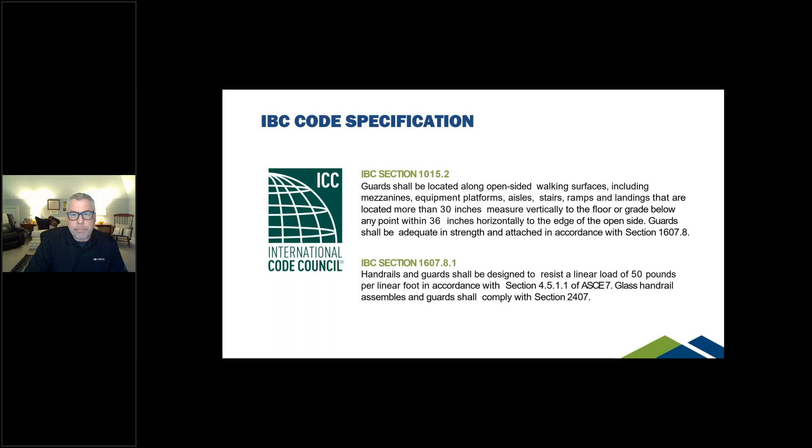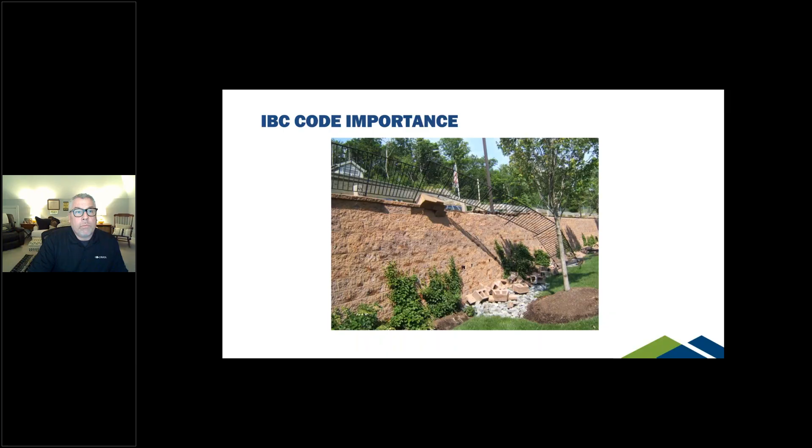There's other options, of course. One option, certainly, and this is code compliant, is to create a buffer zone between the wall face and the fence foundation. The NCMA best practices manual recommends having a 3-foot offset from the wall face to the fence foundation, and that allows you to meet the code, that 50 pound per linear foot.

As you can imagine, there's some issues around that though, and it's created the opportunity for a pre-engineered fence foundation system. In this particular case, that 3-foot offset creates some issues, and we'll touch on those in a minute.

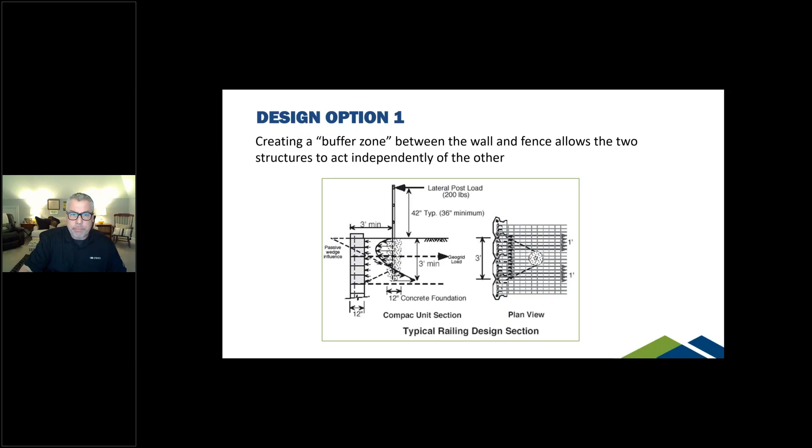But you've also created an area that's still a fall hazard. Kids are going to get in behind that wall, in between the fence and the wall, and you still have some issues.

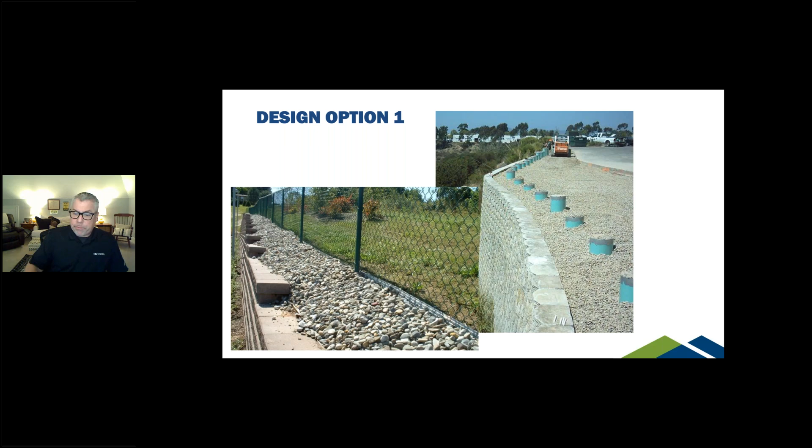Here's another example of that. And some of the other issues, obviously, you're losing real estate when you are placing the fence 3 foot back from the wall face.

There's safety concerns, as I mentioned, maintenance issues. And the other thing, during installation, the contractor's having to compact behind the segmental retaining wall, in and around the geosynthetic layers, and also having to contend with either a cardboard tube that's going to be filled with concrete, and there's real compaction issues around that.

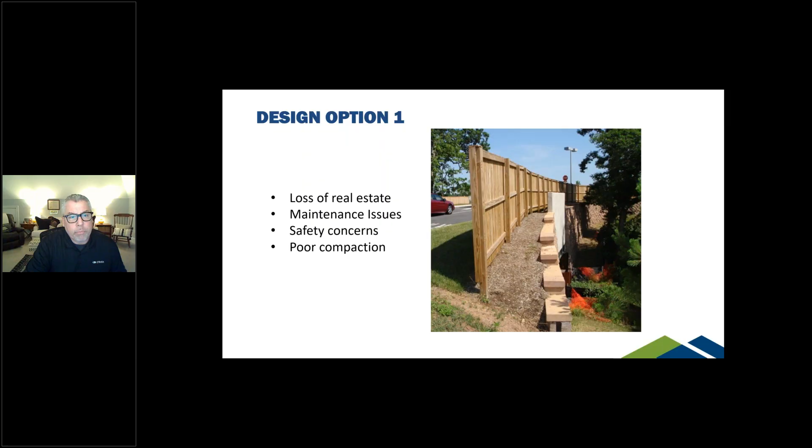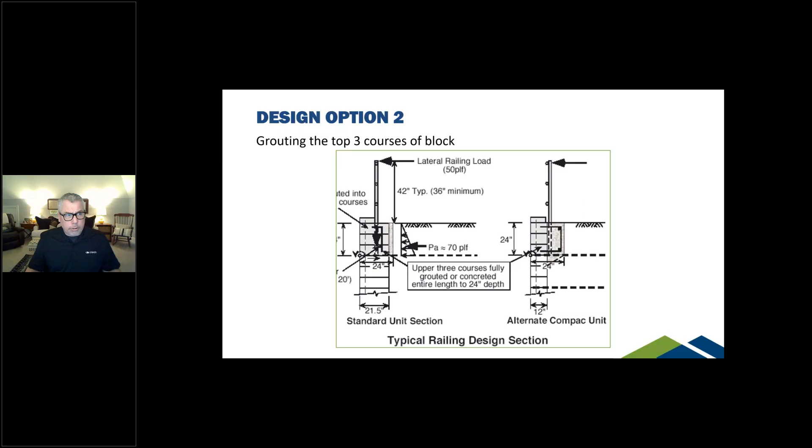Segmental retaining wall is meant to be a flexible structure. It often requires an independent review and design, certainly can be costly. And there's always this notion of having different trades having to work on the same structure, and that requires coordination. As I mentioned, it creates this rigid element.

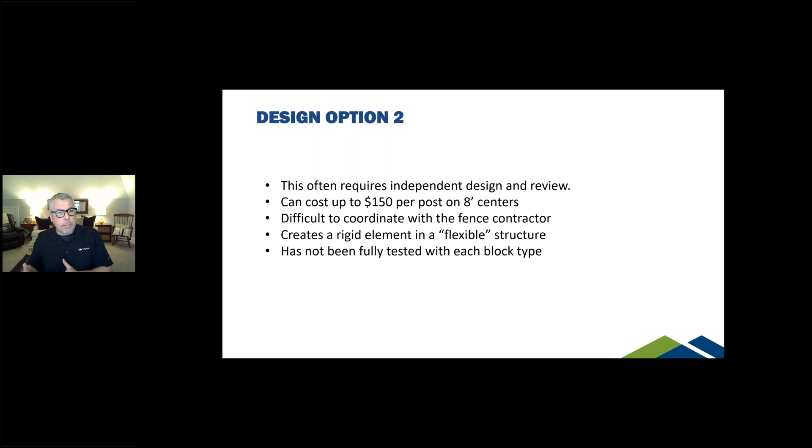There are different block systems out there, a lot of them, and each one has different nuances about them. So grouting some blocks is an option, while with others, you have to be in between them and directly behind them. It really just does depend on the geometry of the block itself.

So as we saw, bolting a wrought iron fence to the top of a segmental retaining wall is not a good option. It's easily failed. And the other option here that you see is coming back after the fact.

The wall's been installed, and the fence contractor comes in and says, I'll have to put my fence in, but there's been no accommodation for my fence post or handrail. Well, in those cases, they're augering through the compacted fill, through the geosynthetic layers, and that creates all sorts of problems. Not only is it difficult to do when you're going through compacted granular fill, but you have the possibility of catching that geogrid and pulling the wall, creating all sorts of headaches that are there potentially.

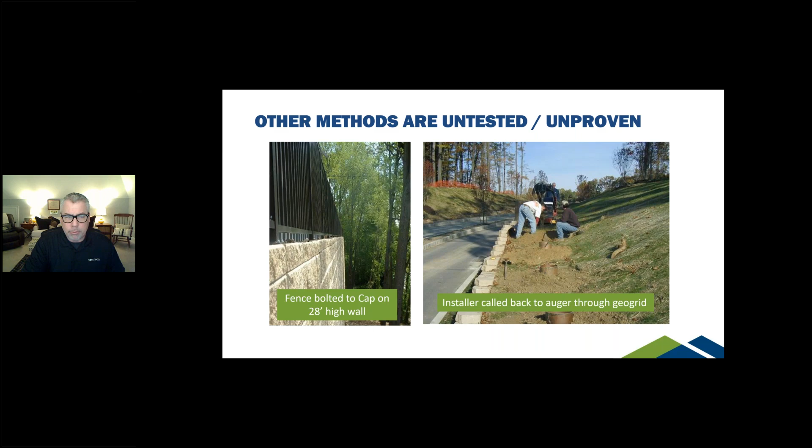So who is responsible? Is it the contractor? Is it the landscape architect, fencing contractor, the engineer?

Well, Sleeve It, our pre-engineered fence anchoring solution, addresses all that. It's been fully tested, code compliant, and it really does address the need for some thought ahead of time as to how to incorporate the fence or handrail behind a segmental retaining wall.

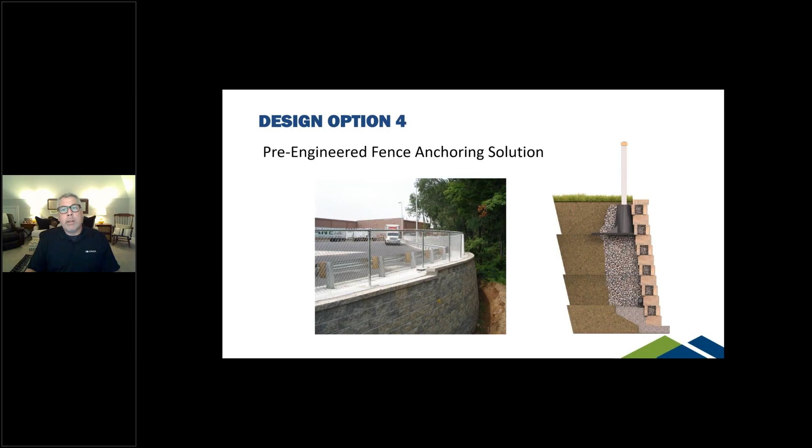As we discussed earlier, the IBC code requires 50 pounds per linear foot on the fence post or handrail. In many cases, we've seen in the past non-code compliant solutions just putting a sonotube right behind the blocks of the retaining wall for the top, let's say, three courses as shown here. That is not code compliant. We've tested it and it does not work.

So the Sleeve It has a cantilever design to it. It's an L-shaped base, and it engages the soil mass directly behind the wall and provides that resisting force to protect the wall face from deflection, and it engages that soil mass to do so.

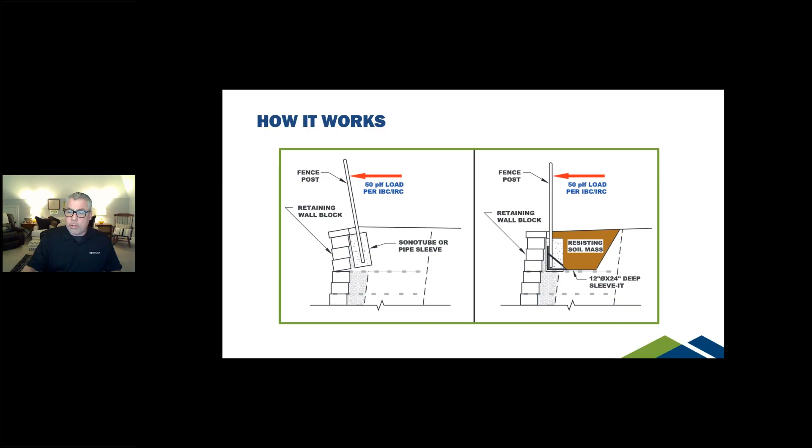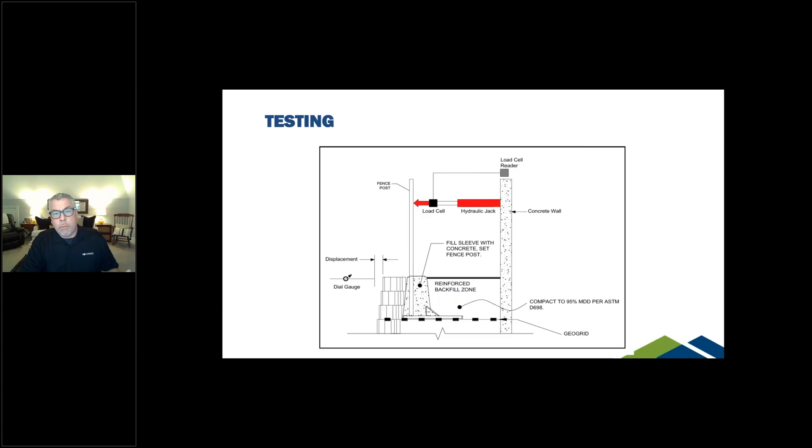In our testing, basically what we've done is taken the Sleeve It, built our mock wall, placed our fill, installed our fence post, and then loaded a hydraulic jack at 42 inches high on the fence post or handrail, and started loading it until failure. That is precisely how we tested it. Failure is basically displacement of the wall face itself. It's subjective to some degree, but displacement more than a couple inches is really failure.

So this is what we've seen in our testing of the cardboard tube or sonotube versus the Sleeve It product. The sonotube, when placed 6 inches back from the wall, is failing at about 100 pounds, and the Sleeve It is far outperforming. So the 200-pound concentrated load is assuming you have fence posts or handrails placed in 4-foot spacing, so there's your 50 pounds per linear foot.

The previous version of Sleeve It was the Sleeve It 1224R. Good system, required some assembly on site. The Sleeve It SD1, which is our newer system, is a one-piece unit, and actually outperforms in our testing the Sleeve It 1224R. Although that was a good system, it just required that assembly on site. We've solved some real headaches for the contractors out there by launching the SD1 product.

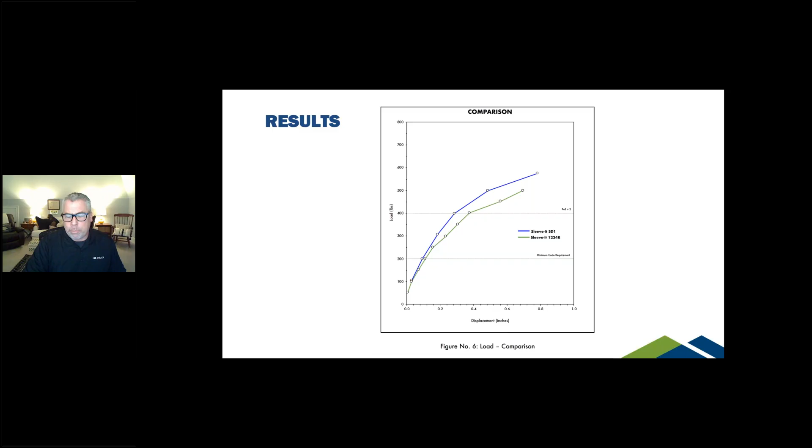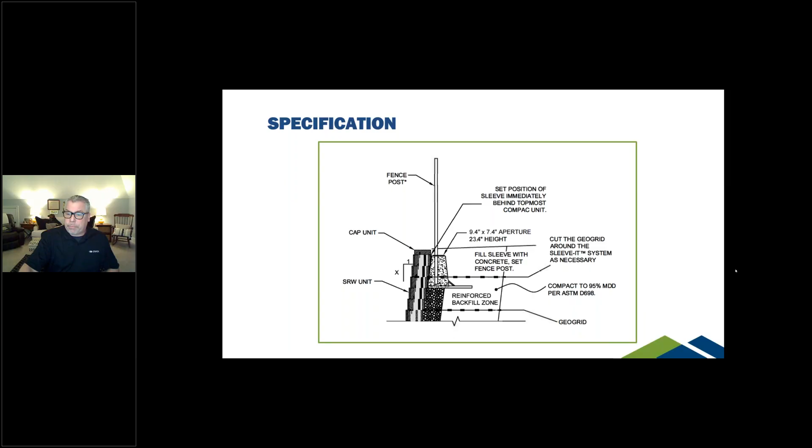Here's the unit itself. You can see it has a tower approximately 23.4 inches tall. It sits back into the reinforced zone 30.6 inches. It does have a perforated lid, which protects it during construction.

Once the fence contractor is ready to install the fence post, they arrive on site. Typically it could be weeks and months, if not months, after the Sleeve It's been installed or the wall's completed construction. They simply knock out the perforated lid, place their fence post or handrail, and pour concrete. It is recommended to use concrete inside the Sleeve It system.

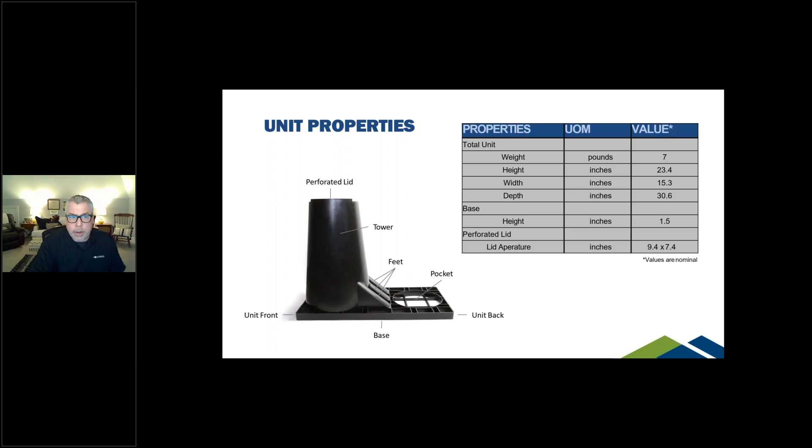So the features and benefits: it's code compliant, it maximizes land use, it's stackable, portable, easy to install, and compatible with most fences. It is made of 95% post-consumer polypropylene, so it's definitely a green product. And yeah, we've seen it really be embraced by consulting engineers as a great solution for a fence foundation with segmental retaining walls.

It benefits all: specifiers, developers, wall designers, contractors, and fence contractors. Fence contractors in particular really like this product when it's specified and used. It solves a lot of headaches for them as they come back to a project where they know they're going to have to install a fence or a handrail on top of the segmental retaining wall.

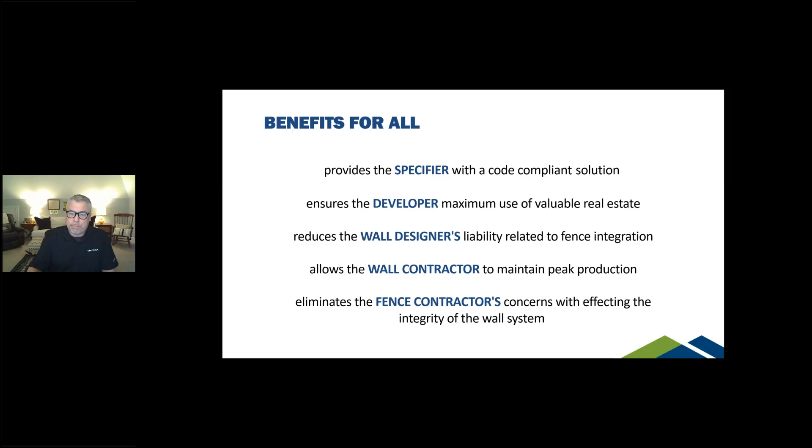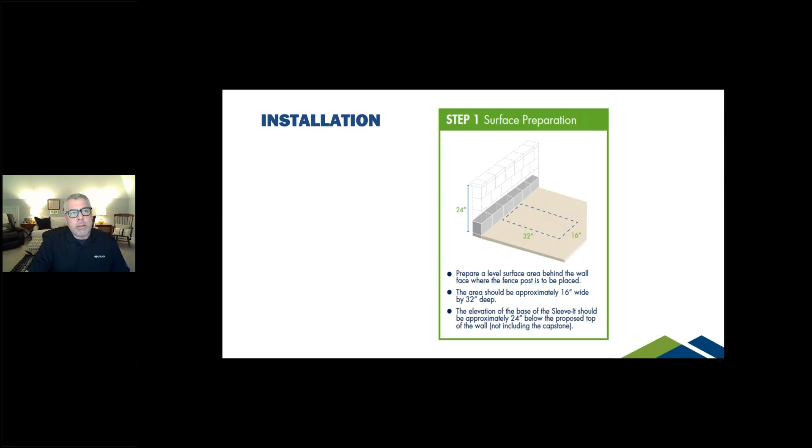Just running through quickly the installation process: you can see we're 2 feet, or 24 inches, down from grade, and we start to consider what we're going to do for our fence foundation. Place the Sleeve It unit and slide it forward to the back of the block, depending on which segmental retaining wall system you're using; you'll have to account for the setback.

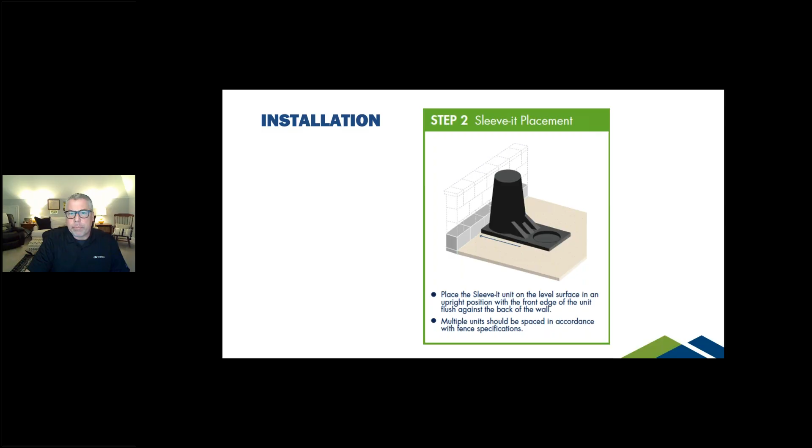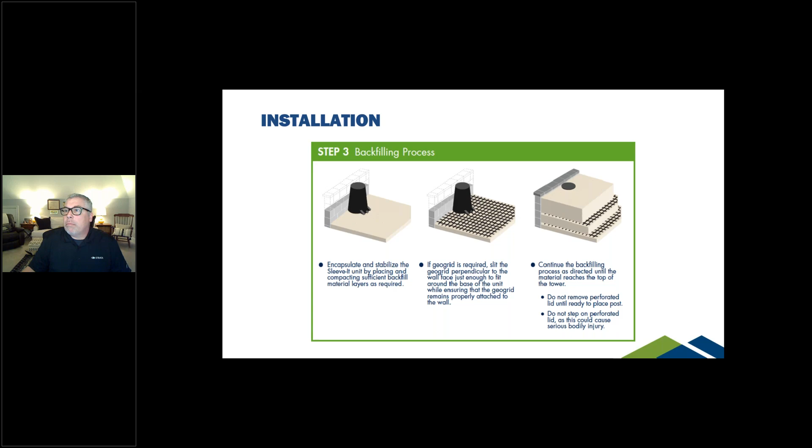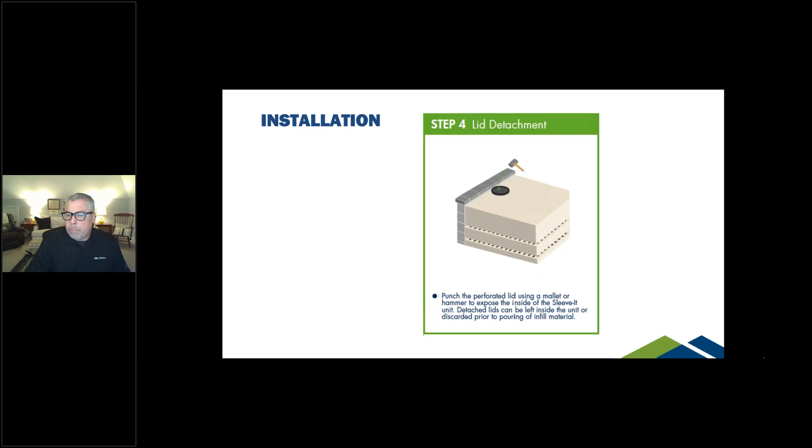Begin your backfilling process just like you would with any segmental retaining wall. Cut the geogrid around the unit as required, and continue to fill and compact in the specified lifts till you get to the top of the unit or to grade. After the wall is complete, the fence contractor comes in and knocks out the lid, places the fence post, and pours the concrete.

That's it for us. That's the Sleeve It unit, our fence foundation system.